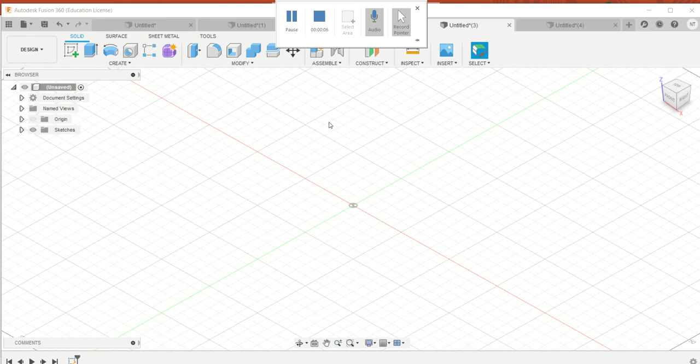Today we're going to go over the Fillet and Chamfer tool. These are features I use to soften the look of an object. As you see here, the fillet tool rounds over the edges of a cube, a cylinder, or any three-dimensional body you have.

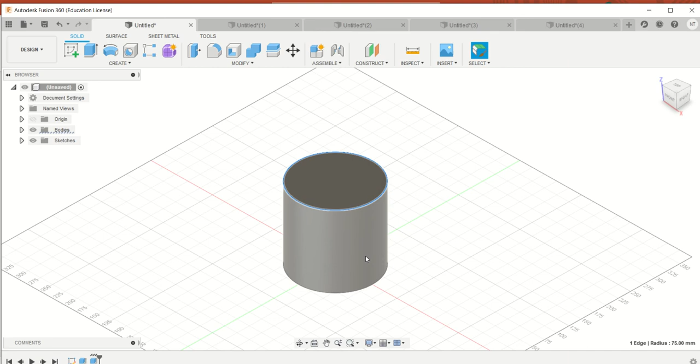For example, let's take a simple cylinder. If you choose any edge or vertice, whichever you prefer, we'll go to fillet. This window pops up with a radius type - I usually stick with constant, I've never used the other options, though I'm sure they're useful. I always stick with rolling ball. When you push the arrow, it rounds over the edge, just like that.

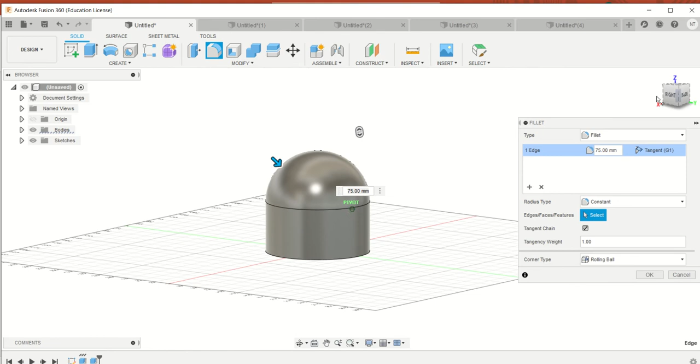I don't normally go that far, it's usually just a simple little round over to make it a bit softer. So you can do one end, and I'll do the other end - F is the hotkey for the fillet tool. And technically we just made a sphere, although that was completely by accident.

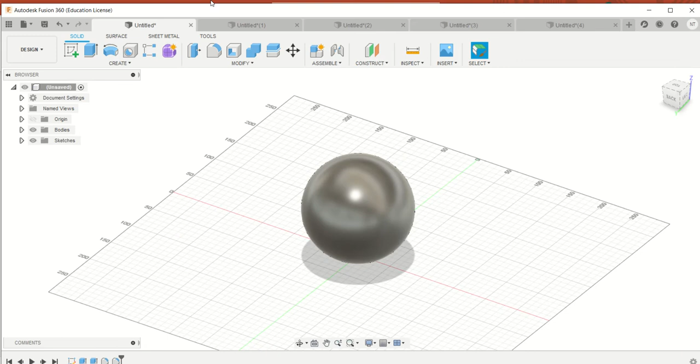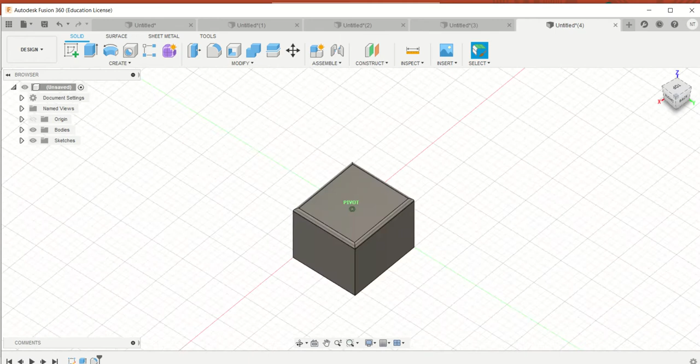Now we can go to a cube, or something close enough to a cube. We can choose any of the vertices, using shift to select multiple. We go to the fillet tool and round over any of the edges just a little bit to make it softer. If you're 3D printing it, instead of having a sharp edge, you can have this - it makes it look a little more professional in most cases, though you could always go overboard.

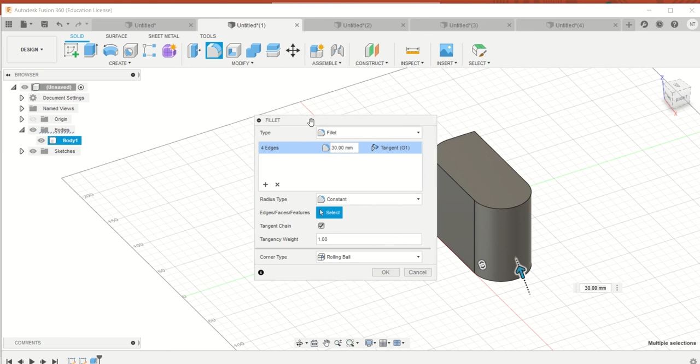So I'm going to choose these four over here to also fillet. There we go - it's a fun tool to experiment with to see if you like the way it looks on your object. You can also choose any of the edges, any random ones, and pull the arrow or type in an amount. The fillet tool is fairly simple. I use it more as a finishing touch, but I'm not a professional, this is just what I do for fun.

Now we're going to move on to the chamfer tool. I use the chamfer tool in a little more precise manner. Let me go back to a regular cylinder and a regular cube. The chamfer tool does not have a hotkey, it's in the modify section by chamfer. Instead of rounding it over, it creates a flat surface.

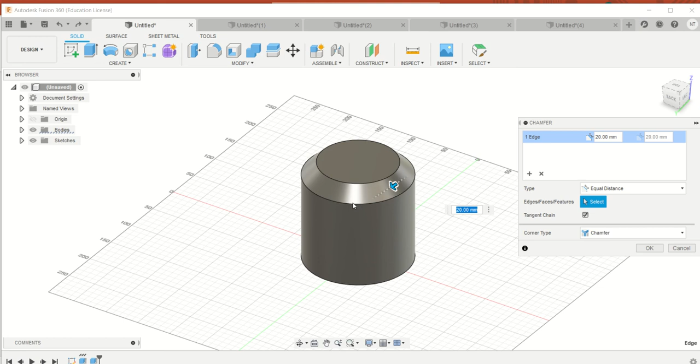So this is on a cylinder. Let's go to just a cube. Go to chamfer - it creates a flat surface at a 45-degree angle. With the chamfer tool, you can also change the options: whether you want 45 degrees, two distances, or a distance and an angle.

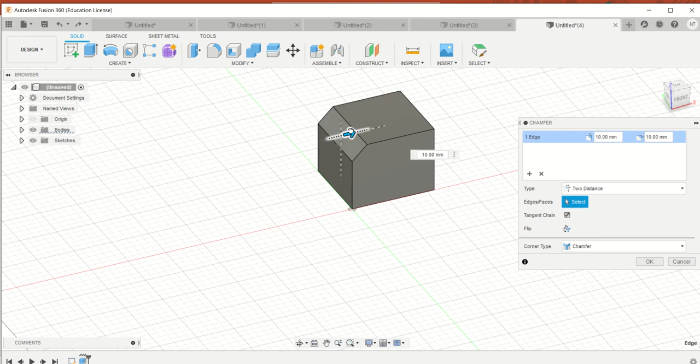This is 25 and 45 degrees - you could change the angle right here, or change the distance and fix the angle. Or you can go with two distances, where you start from the beginning, move this over a little bit, and then move this down to more of what you want it to be. I happen to use the two distance option the most.

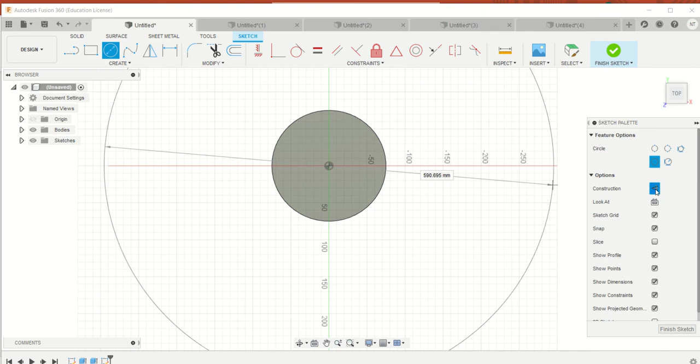So for example, if I go back to the cylinder, and let's say I want to chamfer to a specific spot, I can create a construction line over here - just go to construction. Let's say I want to chamfer it up to here. So I go to chamfer, choose two distances, and I can move this all the way, pretty close to that edge, then decide where I want it to go from there.

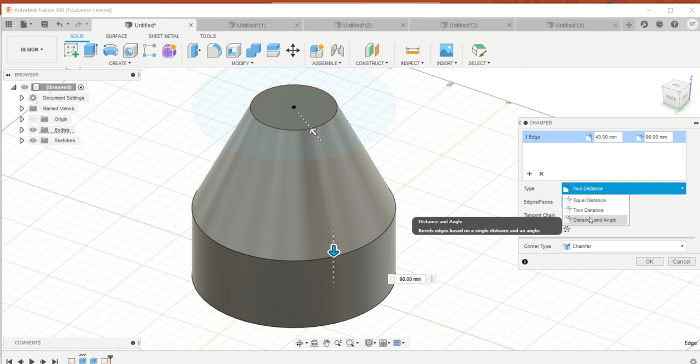This is why I like two distances, or if you know the angle and want to do the math, you could always do a distance and an angle. So I know I want to go this far, and now I could choose the angle to which I want it to go.

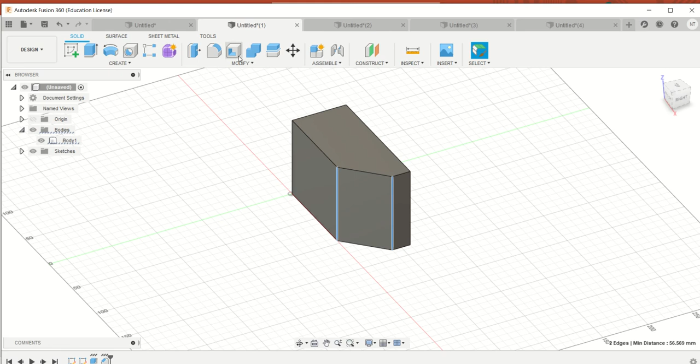One of the more common things I use these for is just little modifications. So if I take this edge to chamfer, I could push this in, click OK, and then chamfer this edge, both edges again, to create more of a rounded look, but more blocky.

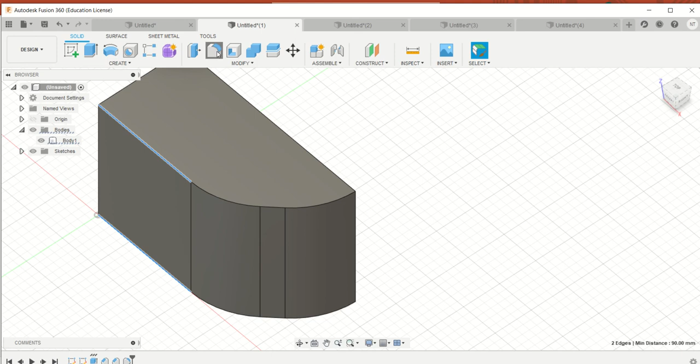If I want to create a more rounded look, I could select each one of these edges and do the fillet tool, and round each of these edges to create something like this - round them up a little bit, something like that. I can then choose this and this and fillet it just like that.

And then I go back around here and choose chamfer just like this. And this actually looks like a computer mouse to me, I don't know why. But technically I have successfully created a computer mouse.

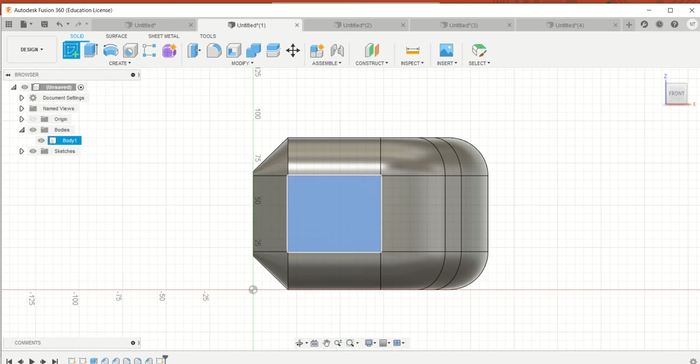I can technically just - let me see what I can do here, play around with it. Go with an ellipse. It's a little too big. Move this over here. Now I'll select this, E, let's do 5.

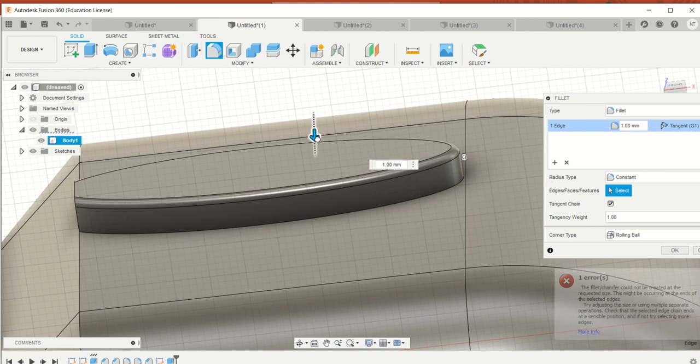So now it's like this, and once I want to create the mouse ball, I can do a fillet and go as far down as I can. Oh, that's a little too far. Just like that, and there we go - the world's chunkiest, worst looking mouse.

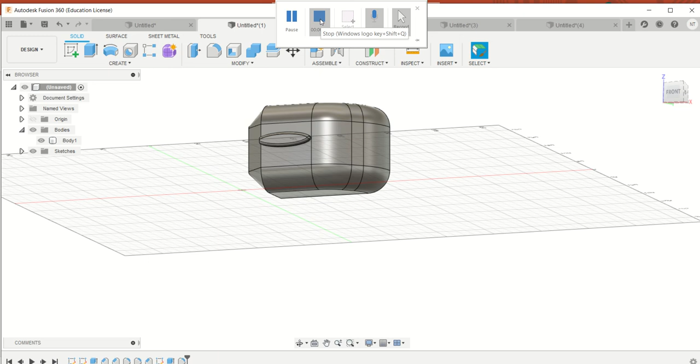But this is all just using fillets and chamfers starting from a 3D object, and that is the basics of fillets and chamfers. Once again, each of these features have many more options that I have not tried out, but you're welcome to experiment with them and have fun and see what you can come up with. Next video, we'll be talking about the shell tool, and that should be video number 5.